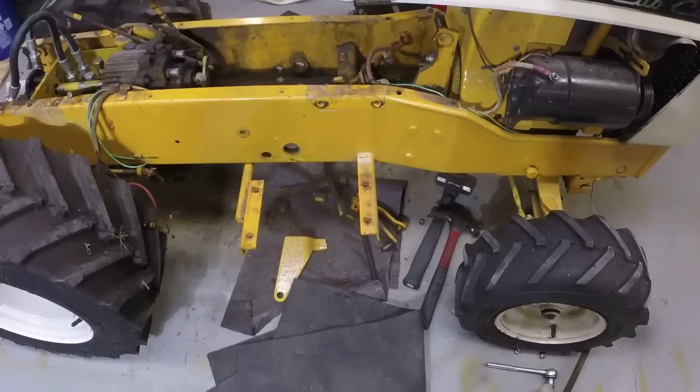Frank here. Gonna make some more progress on the Cub Cadet forklift build. Got it mostly stripped down. Gonna take a couple more items off and then mark the frame, get ready to cut it.

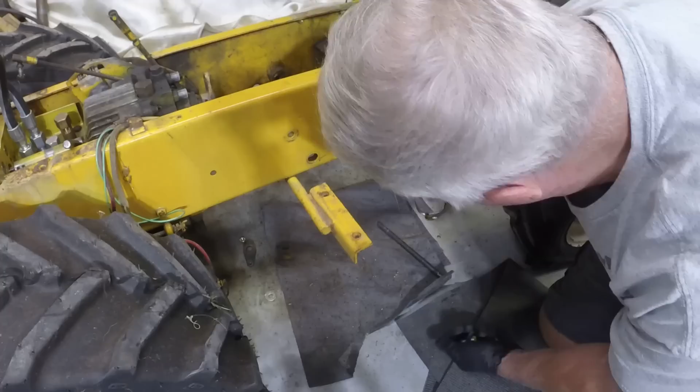It's a sizable piece of steel. That's for the lift. Holds one end of the lift cylinder. Won't need that anymore. Clean up some of these tools. Spent roll pins.

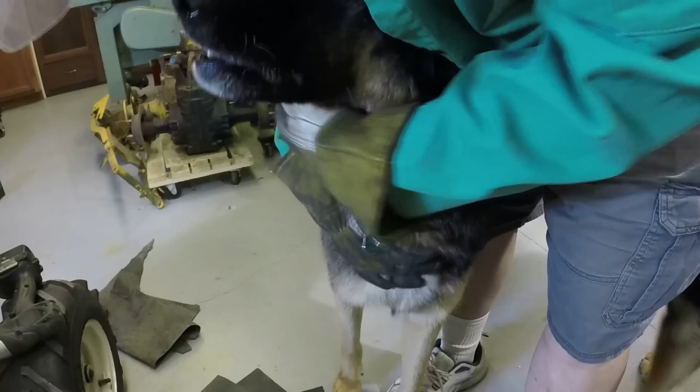You being a good boy? Huh? Come in to visit me again? Huh? Yeah, you're a good boy. You're a good boy. All right. You're such a good boy. Okay. That's my Butchie. And there of course comes my Brutus. You heard me talking to Butchie. Good boy. Good boy. Alright. Butchie comes back for some more.

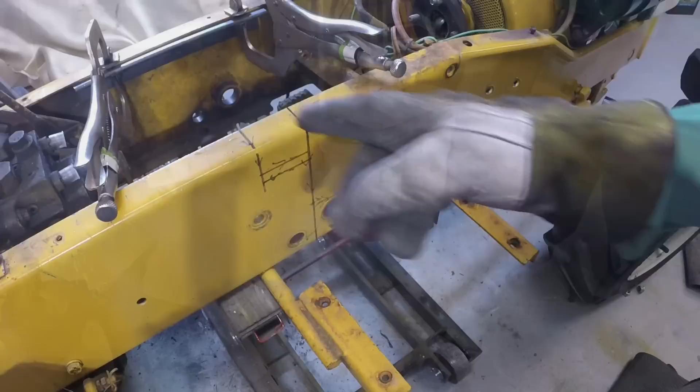Alright, going outside now because I'm going to make some noise. Alright, so I will ultimately cut a zigzag for the extension. At least I think I will. But right now I'm just going to do a vertical cut until I decide the length of the insert. Just be simpler.

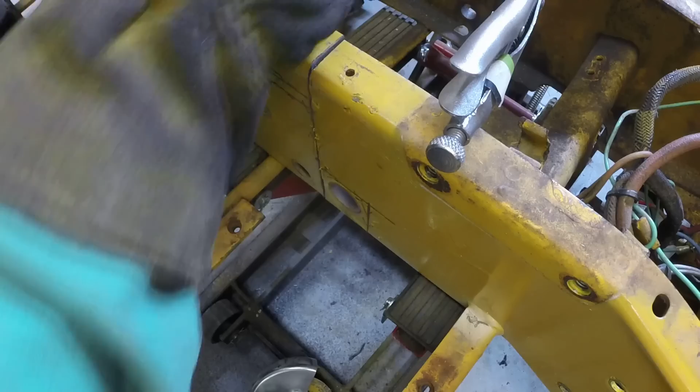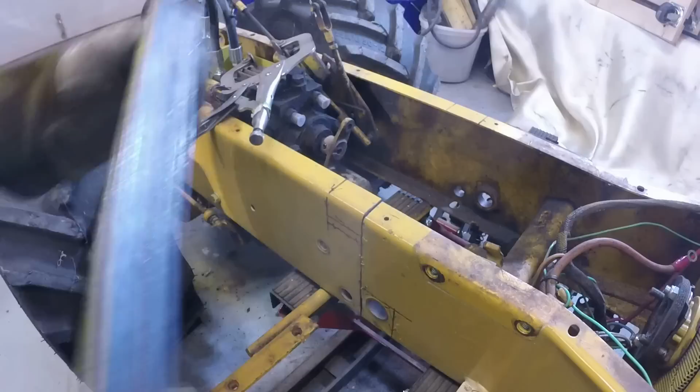Alright, so I got the motorcycle lift under the frame here. Hold it together. I'm going to clamp a piece of angle iron here.

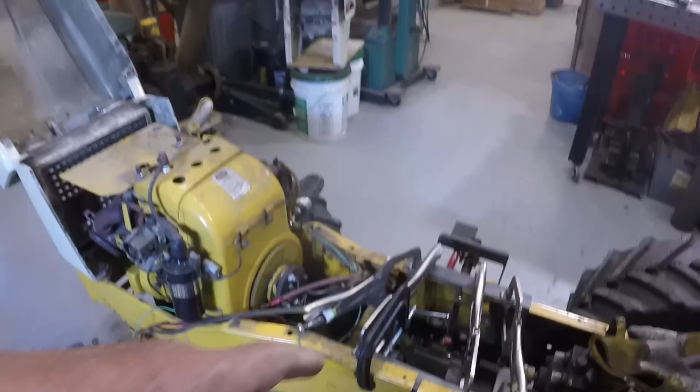Alright, I'm not going to spend a lot of time trying to clamp this back in position. I was using these two pieces of angle iron to hold the frame in alignment after it's been cut. But I need to put longer pieces in there so we can stretch the frame out. So it's just held temporarily here, kind of awkward. So we'll start with like 12 inches and then see how that works.

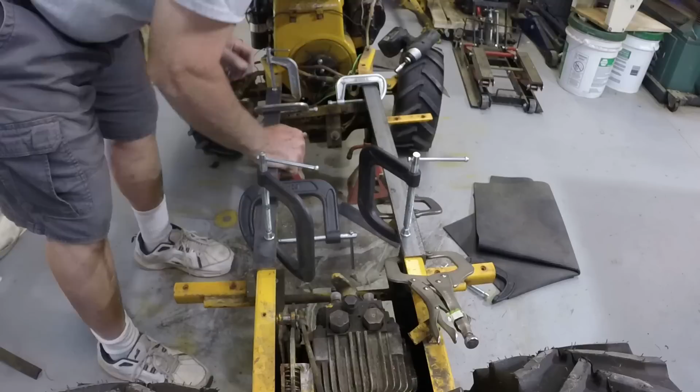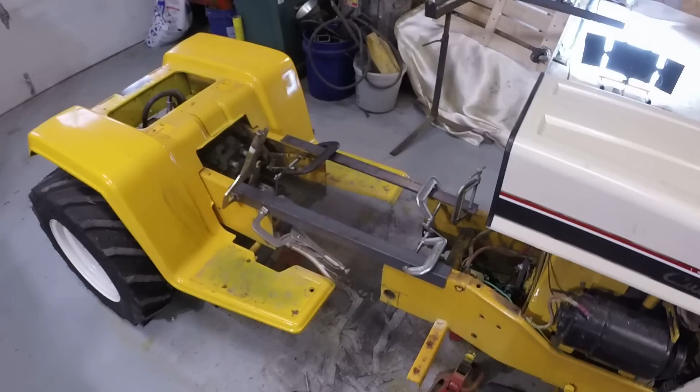Got the frame clamped together here temporarily with about a 12-inch spacing. Lengthen the frame about 12 inches. I'm going to check this out.

And here come the boys. It's Brutus and Butchie. Right on schedule. Every 20 minutes. All right, you guys. All right, go on. Good boys. All right. Good boys.

All right, we'll see about putting a seat on here, and it looks like this might be, you know, reasonable extension.

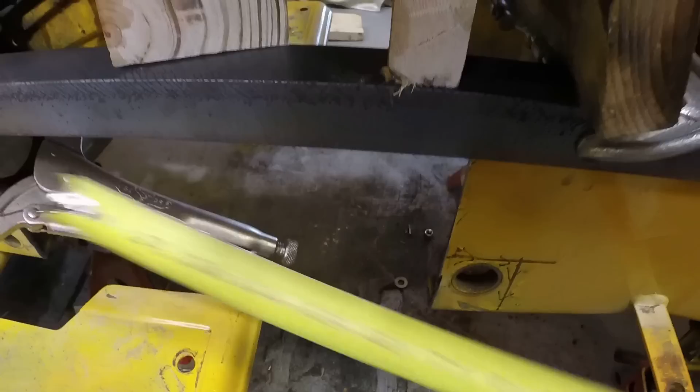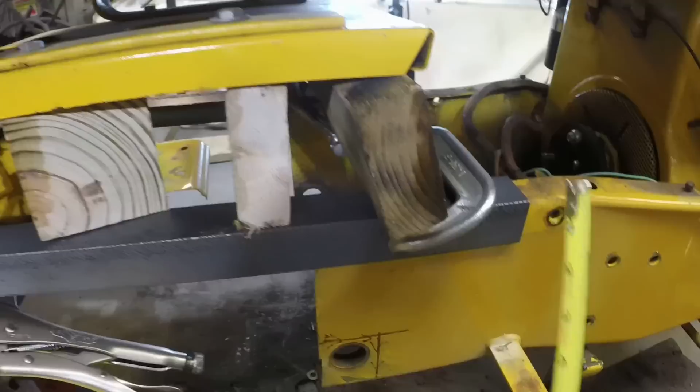All right, I think we've arrived at a reasonable compromise here. Let's just check this distance here. Got 12 3/4. That's 1 1/4 wide. Same at the bottom. And it's 7 inches.

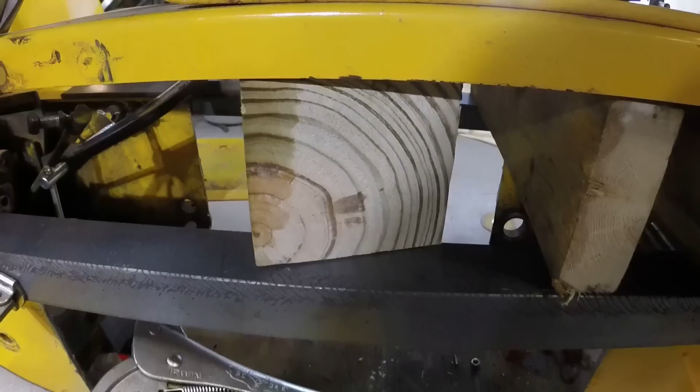All right, I'm just looking at the overall scale of it and trying to make it no longer than it needs to be, because that increases the turning radius, and it's not going to be great as it is, but it'll be okay since it's the rear wheels turning. That'll help, but long enough for you to have adequate leg room. I think this is a reasonable compromise. A little bit less leg room than ideal, but better turning radius in the end.

Okay, so we measured 12 3/4, lengthened by 12 3/4 inches, and next thing we'll do is go ahead and model a splice piece of metal to put in there in Fusion 360 and look at cutting it out on the plasma table.

All right, I'm going to try to do this Fusion 360 demonstration. I'm actually filming the screen on my laptop because the screen capture software that comes with Windows 10, which is like a gaming thing, Windows button plus G brings up a capability to do screen captures, but when I did it, it didn't show any of the dialogues. It only showed the main screen, and it showed it shrunk. So hopefully this will work okay.

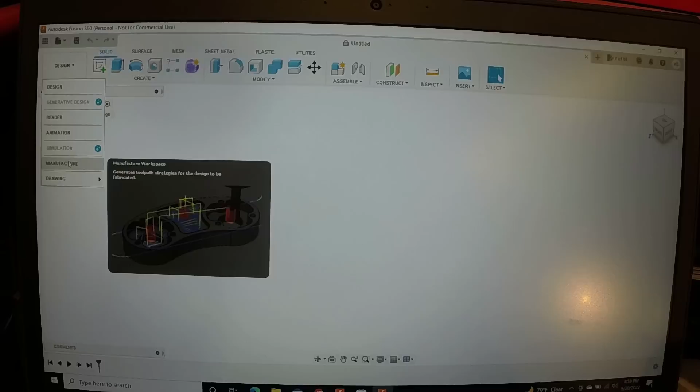So we start out in design. We're just going to create a simple sketch. We hit select sketch. It brings up a XYZ coordinate system. I'm going to simplify that. Upper right hand corner here, I'm going to select the front.

That gives me X and Y coordinates. I'm going to use my mouse to move the origin down a little bit. We click on that surface and that tells us that that's where we're going to do the work. You can see there's coordinates here, 5, 10, 5, 10, 15. And this is set to inches because it's been set in the program defaults.

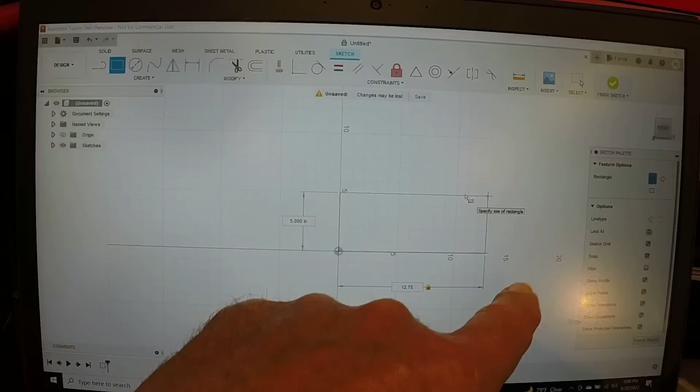I go up here to the left-hand corner, to menu, pick 2-point rectangle. I'm going to draw a rectangle which is 12 3/4. You can see down here it's highlighted. It says 11 inches. You can just type in 12.75 and it will make that line, the rectangle, that length. Tab takes you up to the other dimension. We make that 7 inches and hit enter, and then it creates a rectangle of those dimensions.

We made some notches in the frame, so I'm going to make another rectangle to fill that notch, and it is 2 inches long, and hit the tab key and it takes us to the other dimension, and that's 2.5. Hit enter, and we can go up to the other corner, do it again, and these are the tabs we drew on the frame. Again, 2 inches wide, and I want it to be 1 inch. Hit tab, make it 1 inch, hit enter, so it creates another tab. These are individual components of the drawing, but we'll combine them in a minute.

So let's zoom out a little bit. I'm going to do one more rectangle at the top here, and this is for the flange, and it's 14. You see it says 14.75 there, and we hit tab, we go to the other dimension. It says 1 inch. I want 1 1/4, 1.25. Hit enter, so that creates that flange, which will bend over. I'm going to try to bend it anyway. I don't have a brake, but we'll figure out some way to bend that over.

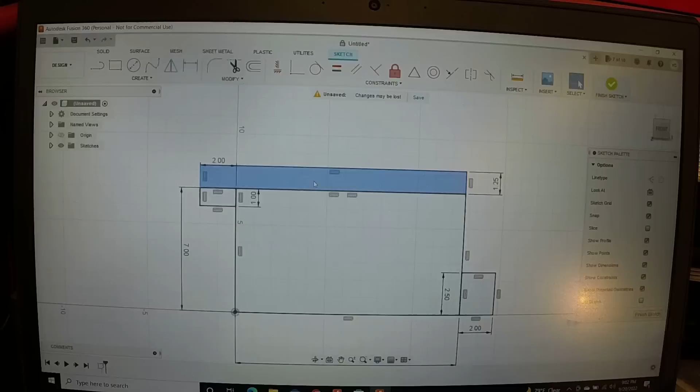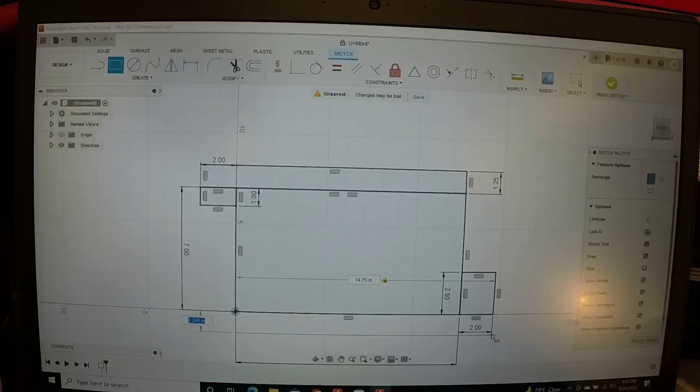And then down at the bottom I need the similar flange. Start in this corner, go all the way over to this side. It's not snapping to that dimension, so I'm going to tell it to be 14.75. Tab to the other dimension, make that 1.25. Hit enter, and it creates that rectangle. So now we have all these little rectangles.

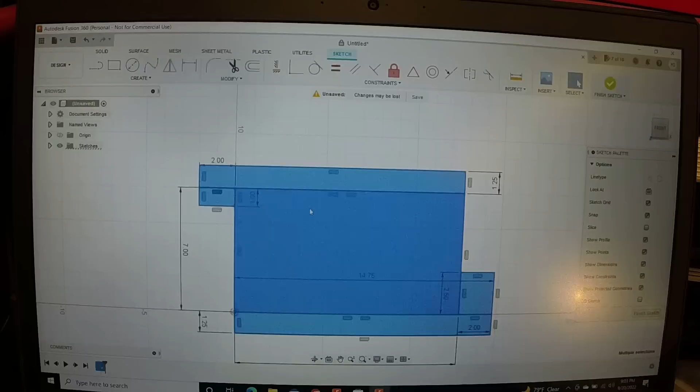Press the control button, select with the mouse each of these rectangles, and so by selecting them all, I can create a single body from all of these components. If I right click, I get a little menu here. I'm going to hit press pull, and alright, so I got a dialog over here. It didn't keep all of my selections here, but if I reselect them all, I have this dialog. It says 5 profiles, 5 selected.

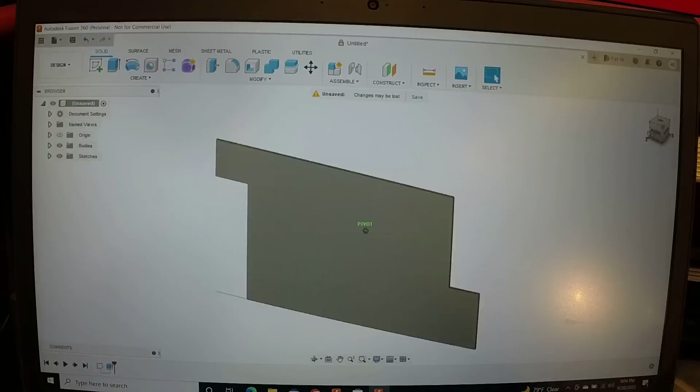The distance I'm going to extrude it, press pull is really extrude, is 0.125, 1/8 of an inch. No angle. It's going to create a new body. I'm going to click on OK. So that combines all of those components into a single body. I can go up here to the top right corner, rotate this little cube, and you can see, and I can zoom in. There's some thickness, and we have a body. So go back to the front view of it, zoom back out. So this is the piece of steel that we want to cut out.

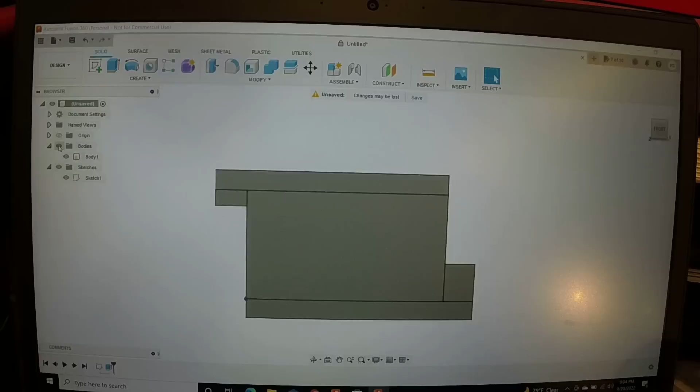Over on the far left, there is a directory tree which allows you to look at your bodies and your sketches. You can turn the bodies off and turn the sketch back on, so you can control what you're looking at, what pieces of your overall design. And that's got sketches and bodies. Turn the sketch off and you just see the body. Of course, in a complex project, this would be, you know, a lot of stuff.

So I want to save this project. I'm going to call it Splice 2. Hit save. And I'm calling it Splice 2 because Splice 1 was what I called the original file when I did the screen capture, and it did not work very well.

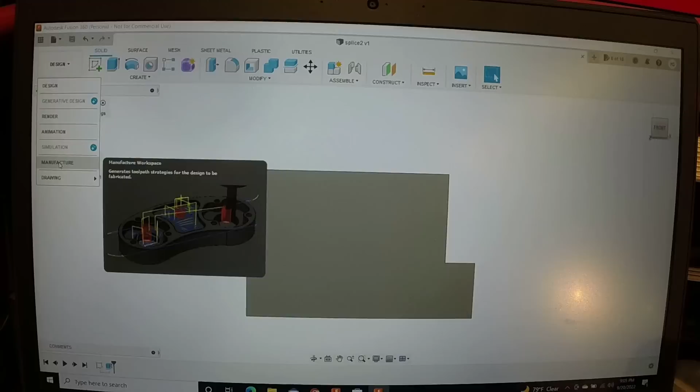So go over here to the upper left, pick design, go to manufacture, and I'm going to change the dimensions from millimeters to inches. And there's 3 steps we need to do. First, we need to create a setup. So new setup. We select the origin. Go over here to this dialog. It's a generic machine for cutting.

Go to the stock tab. No additional stock. There is a choice to add additional stock. And in the post process, the file that we create, the G-code file, we're going to call it Splice 2.

Okay, so that's setup 1. Again, you'll have setups here, profiles, and all the different components to your project.

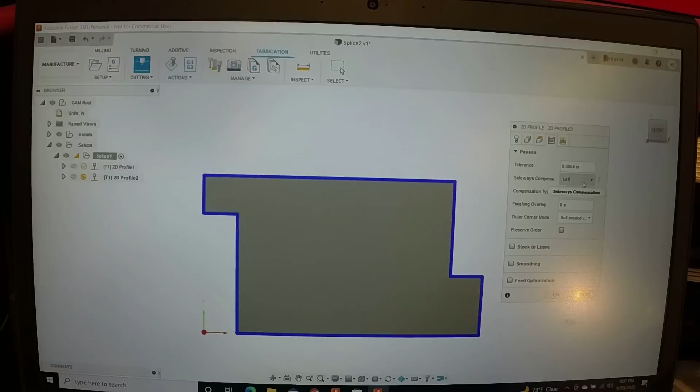All loops start on the outside. Retract height, clearance height, those sort of things - I don't normally change those. This is resolution, compensation, cut to the left, overlap 0, stock to leave, smoothing, feed. There's other things you can do, but I don't normally need to change any of that.

Lead in sweep angle, lead in distance, those are kind of default numbers, I don't normally have to change those. Sometimes I'll have to reduce this lead in distance if I'm cutting a small hole. The 0.2, which is basically 2/10 of an inch - if you're cutting a 1/4 inch hole, that's too big, so sometimes I have to reduce that for small holes. But for this, it's just a plate, we're doing fine. Say OK on that.

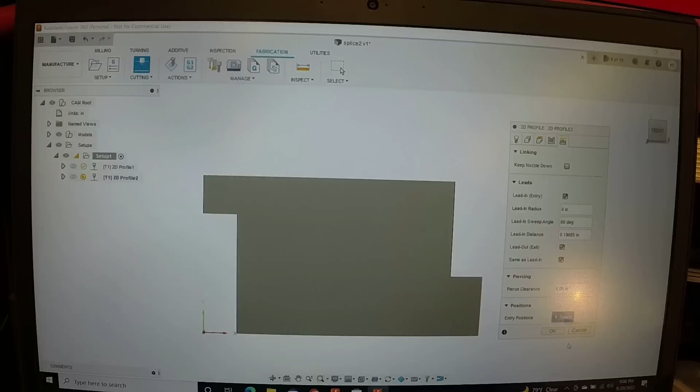So there, it creates the cut path. We can pick the simulator here, simulate the cut process. There we go, you can change the speed on that, slow it down a little bit.

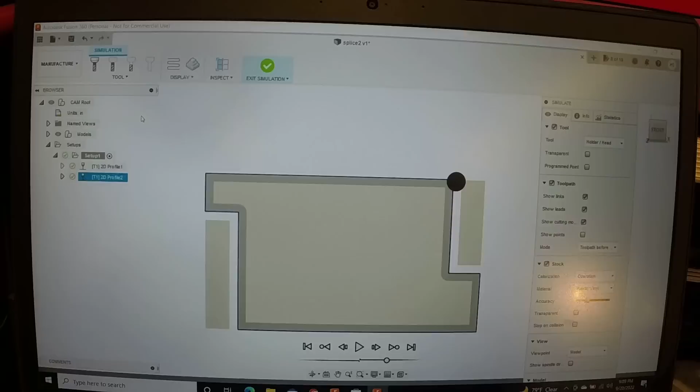All right, so that's the cut process. We can exit the simulator, go back here to the menu, which is post-process. We're going to do splice 2.

We need to use the FireControl plasma cutter post file, and that specifies the cut height, 63 thousandths, spring back is 20 thousandths. The torch height controller comes down and touches the top of the sheet and then raises up, and this assumes there's a little bit of spring back on the sheet metal to allow it to adjust the cut height. Pierce delay 0.8.

That may be a little bit much for this, but it'll work fine. Pierce height 150 mils, retract height 1 inch. The file name is splice 2, so we'll click post, and we get a message down here: NC code successfully posted. So that's the file for FireControl.

All right, we can go over to FireControl, launch that. Already open. Not sure where it is, if it's already open.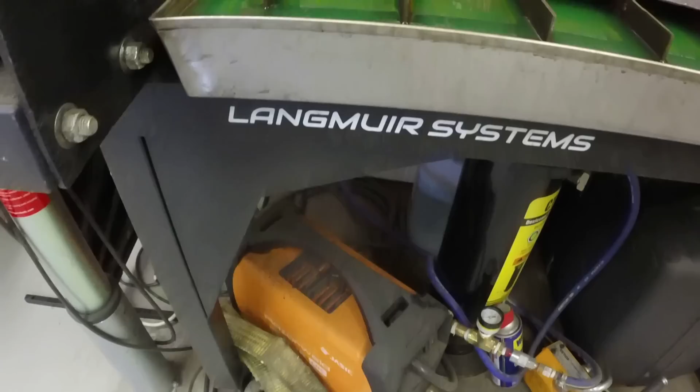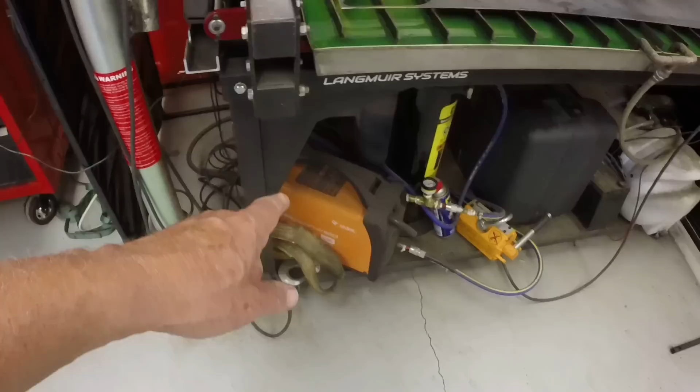Cuts a lot of steel. For those of you that are new, this is a Langmuir Systems Crossfire Pro plasma table, powered by a 45 amp RazorWeld CNC plasma cutter. It's got what's called a machine torch as opposed to a hand torch. I feel like it mounts easier.

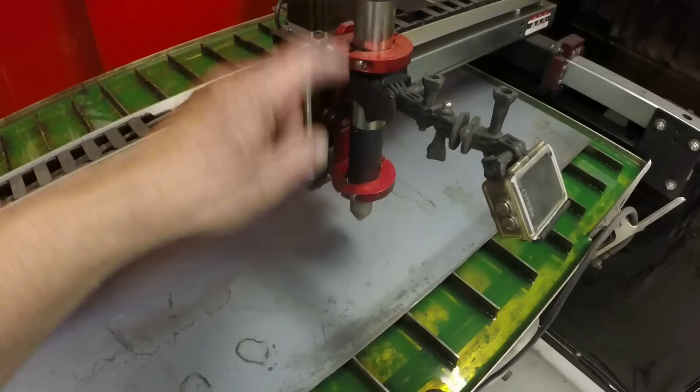The table's full of water with a 10-to-1 ratio of preservative and anti-rusting ingredient. I think it's called Plasma 1100 or something like that. The table holds about 15 gallons, so you add a little over a gallon, maybe it's 20-to-1. Anyway, I forget, it's been a while since I mixed it up. So you add a gallon of the concentrate to the water, and it prevents rusting of the table.

The pan is stainless, but the sacrificial slats are carbon steel, so it prevents rusting. If you've seen somebody's plasma table they've used for a while that doesn't use a preservative like this in the water, it looks like a rusty mess. I've had almost zero rusting using this.

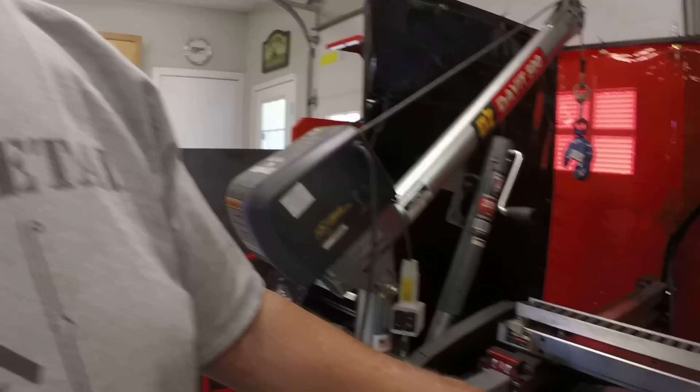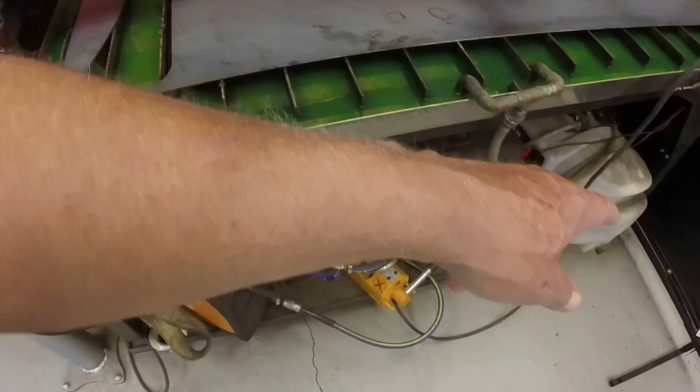So it drains when I'm done. There are 2 drains in the table, and it drains into this large sprayer tank down here, a 20-gallon or 15-gallon tank, with a pump on it. I use a garden tractor battery, and I can refill the table through this hose and discharge into the table. So I can pull the drain plugs, drain it to the tank when I'm not using it, then pump it back up and fill the table.

All right, so that's the plasma table. There's a control unit mounted on the side back here, and it's controlled by my laptop, an IBM Ultrabook, I think it's a 460. It's a few years old, but it runs Windows 10 fine, and it runs this plasma table fine. It has adequate graphics in it.

And for those of you that haven't seen, this is my little jib crane. It's a 500-pound capacity crane, and right now I've got a plate dog on it, and I use it to take sheets of steel out of this rack where I store my sheet steel. In this rack, they're all 4x4 foot pieces. I'll roll this rack around on wheels, move the jib crane around, pull a sheet out of the rack, lay it flat on the floor, then I get this magnet lifter, put it on the crane, pick up the sheet of steel off the floor horizontally, swing it around, and set it on the table. So that's my material handling mechanism, and it works fine.

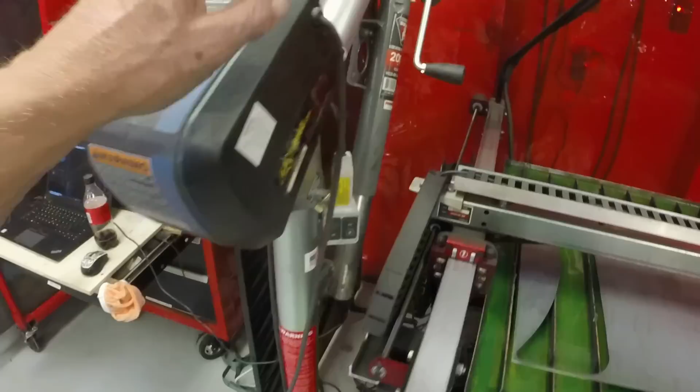I've used it for up to 3/8 inch steel. A 4x4 sheet of 3/8 inch steel weighs like 245 pounds, but it works fine, I just have to be careful. This little jib crane is a lifesaver—I could not handle the larger pieces of steel without it.

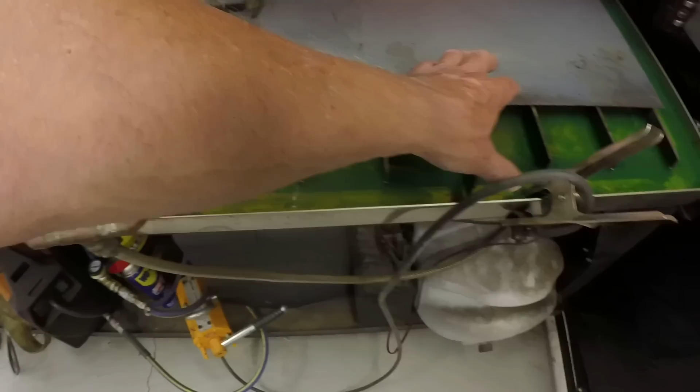What's on the table now is a piece of 1/8 inch leftover scrap from a previous job. First thing I do is measure the distance between the edge of the steel and the table, both ends, to make sure it's square to the table, and that usually gets me square enough. I'm going to move the torch over to a point here in the corner. We're going to set this as our work 0 and cut out the first of the 2 splice plates.

Here in FireControl, these arrows control the motion of the torch.

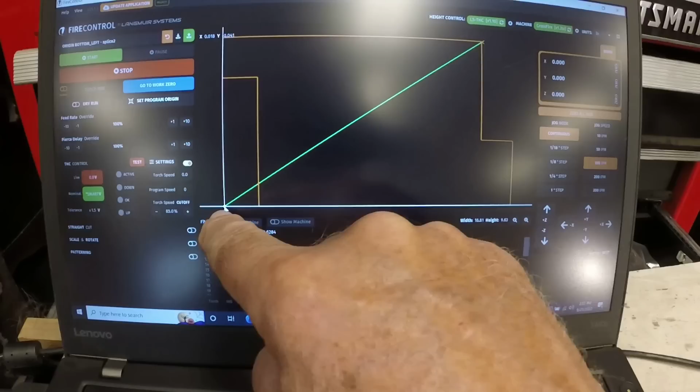Alright, so I've gone ahead and positioned the torch where I want my 0 point. I can go into the software here and tell it to zero all axes. That puts the origin here in the bottom left hand corner. So the overall dimensions of this are 16.8 inches long, 9.63 inches tall. Now let's look at the sheet of steel here, make sure I have enough.

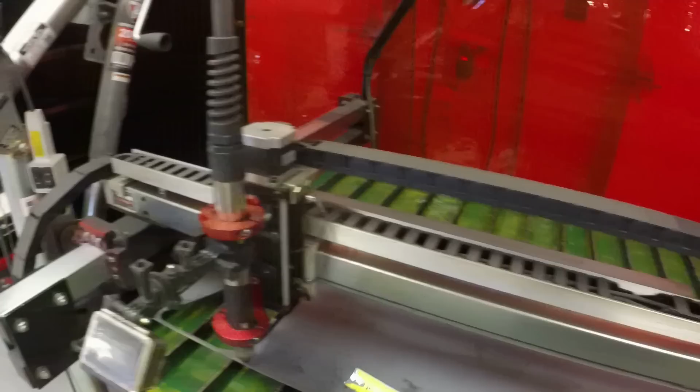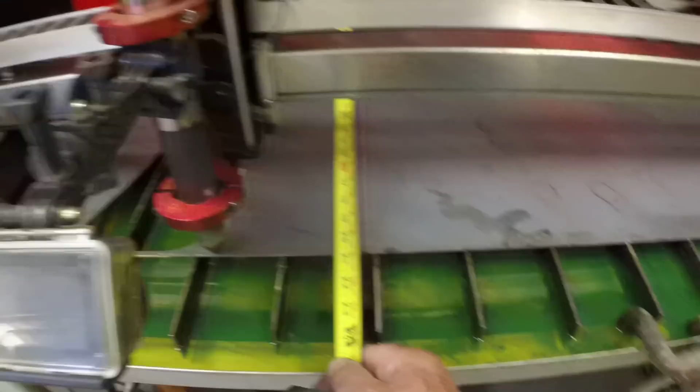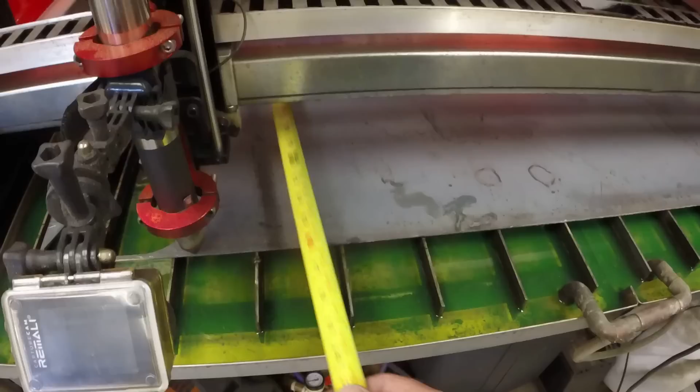So if I'm going to cut 2 of these, I need 32 inches, or actually 34 inches. I've got 41 inches from there and 20 inches this way, front to back. So it'd be better for me to turn the plate, the workpiece, 90 degrees and run it back and forth lengthwise instead of this way. It would give me a larger, more squarish scrap of metal left over.

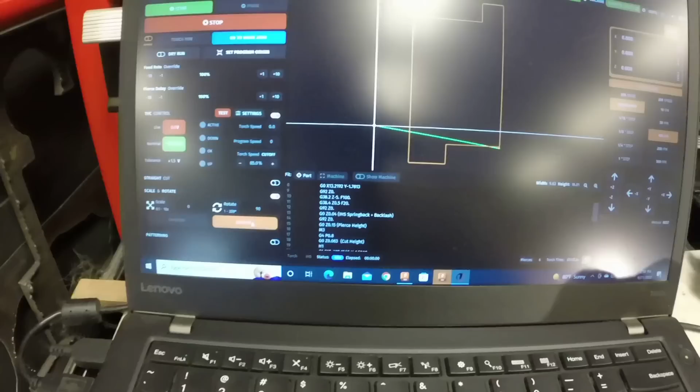So I can go into the software here, turn on scale and rotate. I'm going to rotate 90 degrees, create the new G code, and you'll see the layout changes. We'll go back here and set the program origin in the bottom left hand corner. Our torch is already there—we've zeroed all axes.

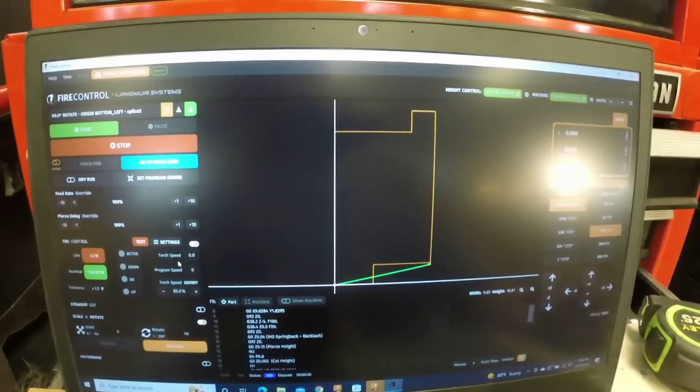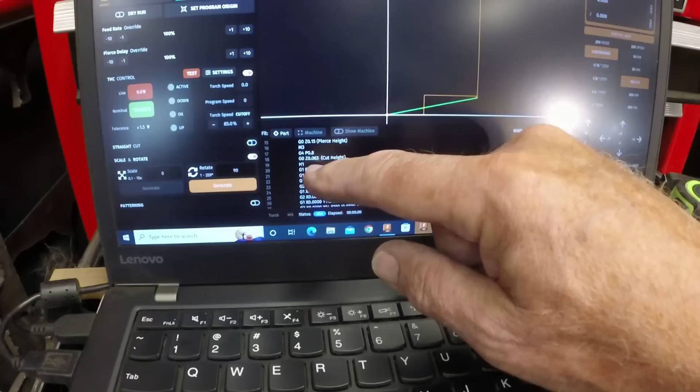Alright, let me just look at the G code real quick and make sure I've got it right. Feed rate is 65, which is correct. Pierce delay 0.8, cut height 0.063. So just looking at the text here, this is the G code file, and you can scroll through it and edit it if you need to, with a text editor. But it looks like it's right.

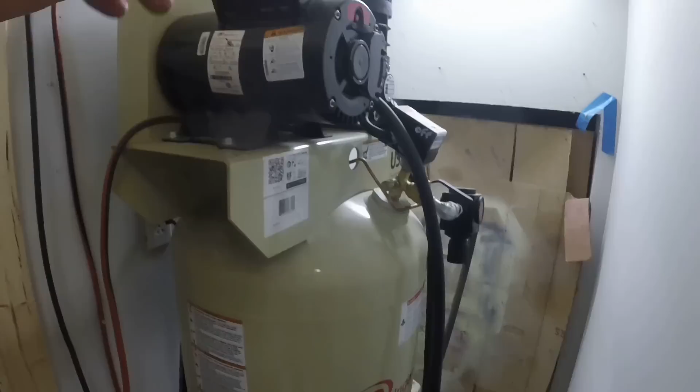So one other thing you need for a plasma table, if you're thinking about getting a plasma table, is a good air system. I have a couple videos on my channel talking about my air system. I have, in this closet - this is a sound barrier really - a 5 horsepower Ingersoll Rand air compressor, and the air comes off of the compressor through the hydraulic line up to a radiator mounted on the wall with a fan.

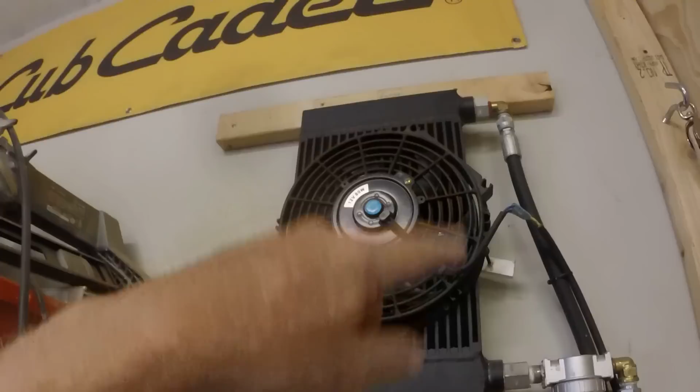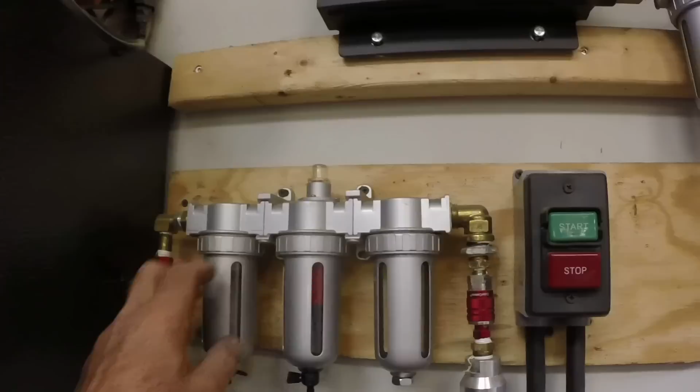So the air goes through the radiator, through a moisture separator. As it cools off, it's going to give up moisture, and then it goes back into the tank. So that removes a lot of the moisture out of the air before it even gets into the tank. And then the air comes out of the tank into this manifold. I've got another moisture separator, an oiler which I don't use, desiccant which I don't use, and then into this little triple manifold here. Goes to a couple different places in the shop.

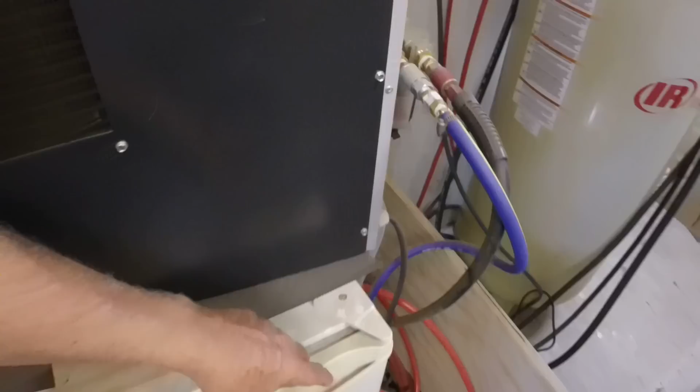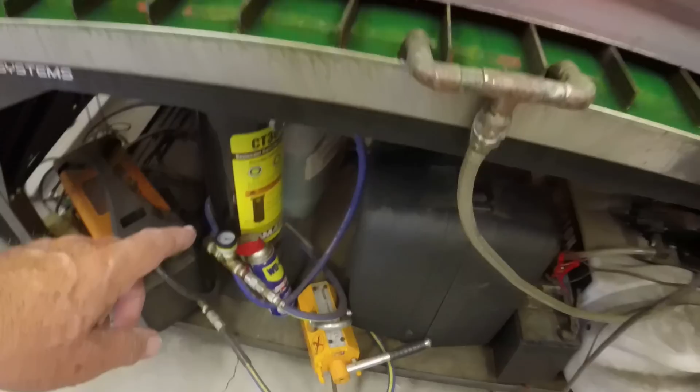One of them goes to this refrigerated air dryer. So air comes in, goes to the refrigerated air dryer, and then there's another moisture separator on the output of the air dryer, and then that runs to - that plywood panel is a sound shield - then that air runs to a large desiccant canister here. This is a, well, whatever it is, 10 pound desiccant dryer, and then out of that into the plasma torch.

So there's a considerable effort to get very dry air. If you have wet air going to your plasma torch, it destroys the nozzle and the electrode. The consumables don't last very long, and so you want clean, dry, very dry air.

Okay, let's cut out a part.

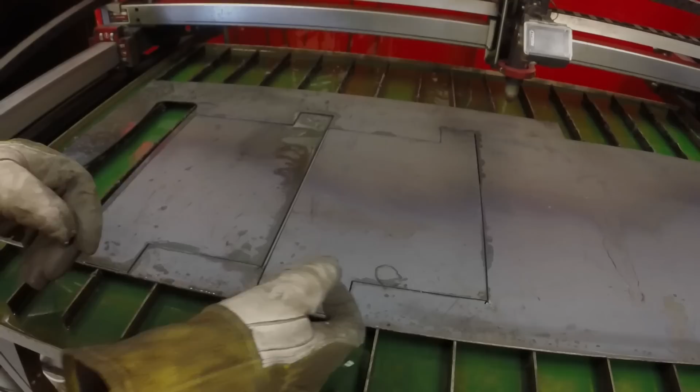So it's cut out the two plates. So there we are. And you can see the quality of that cut. I mean, it's beautiful. There's virtually no dross on the back side. I mean, that does an excellent job.

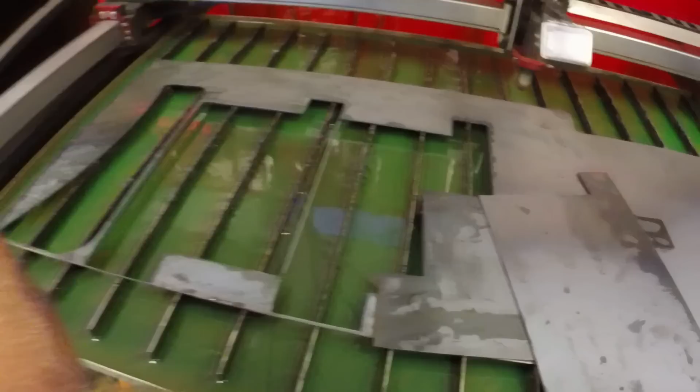Those are the two splice plates for the tractor. We'll come back next week with those splice plates. We'll start fitting them up to the tractor and welding them in place, and getting the frame re-stabilized so we can continue to work on it. And we'll be using this plasma table quite a bit. We've got to cut panels to support the hood, cover the back of the dash, components for the lift itself, backrest, that sort of thing. So you'll see this being used quite a bit.

I have no affiliation with Langmuir, but I have to say, this has become my favorite tool in the shop. It works. It was easy to set up. Not prohibitively expensive. I mean, you've got to invest in an air system. If you don't already have an air system, you've got to allow for that.

And then the plasma table, and then I spent some money on this little jib crane, but I couldn't cut anything thicker than 1/8 of an inch probably without the jib crane, because the 4x4 piece would just be too heavy. I mean, you can lay it on the floor and cut it with a metal cutting saw into smaller pieces, and I have done that when I first got started, not knowing what the crane would handle and that sort of thing, as I started using the plasma table. So you could do that, cut smaller pieces. But even a 2x4 foot piece of 3/8 inch, I mean, it's too heavy for one person to handle. You need someone else to help you pick it up. You're going to hurt yourself.